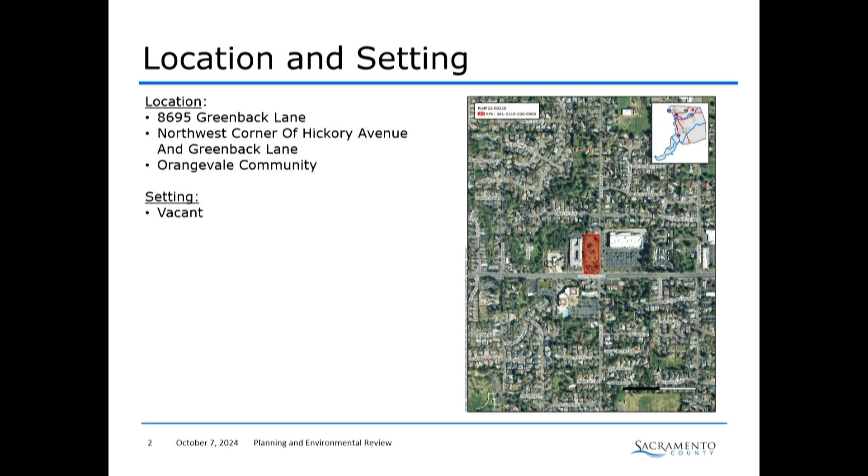The project site is located at 8695 Greenback Lane. The site is situated on the northwest corner of Hickory Avenue and Greenback Lane within the Orangevale community. The project site is currently vacant.

The project site is located within the Greenback Lane Special Planning Area, and it's within the light commercial subzone. Surrounding land uses include single-family residential to the north, a grocery store to the east, a gas station to the south, and a congregate care senior living facility to the west.

I do want to note that the site is identified within the housing element vacant land inventory for approximately 26 lower income category units. The proposed development of the subject parcel would not result in the development of those 26 units for the lower income category. However, it was determined that there are sufficient remaining sites identified in the housing element inventory for the lower income category in order to adequately meet the county's remaining RHNA sites.

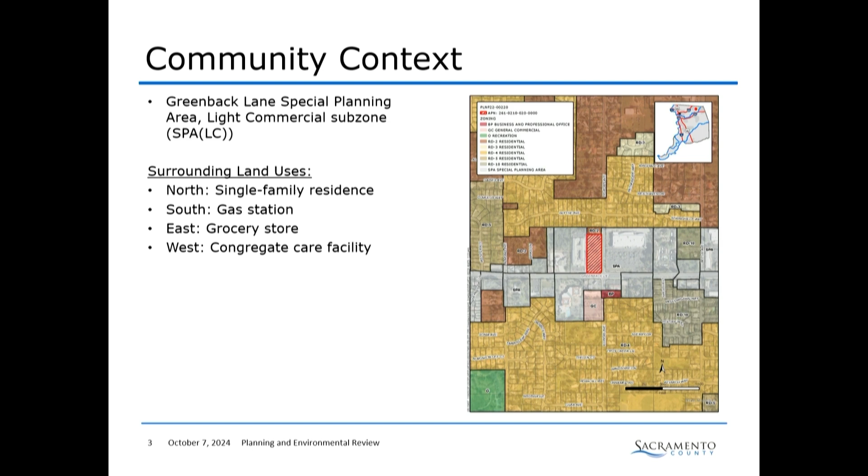Back in April of 2018, the board did approve a zoning ordinance amendment to modify the permitted uses of the subject property from business professional office uses over to uses permitted in the light commercial zoning district. This amendment allowed most of the uses permitted in the light commercial zoning district, including automobile service use and mini storage uses. There was one code violation cited for the subject site for overgrown vegetation last year in 2023. However, that violation has been remedied and closed.

The entitlement request consists of the following: a tentative parcel map to divide a 2.84 gross acre parcel into 2 new parcels in the Greenback Lane Special Planning Area, a use permit to allow an auto service station, more commonly referred to as a gas station, as well as a neighborhood convenience store with extended hours, that being 24/7, within the Greenback Lane SPA, as well as for the proposed gas station fuel canopies to deviate from the following development standards: the design clearance height, as well as the allowable roof structure height.

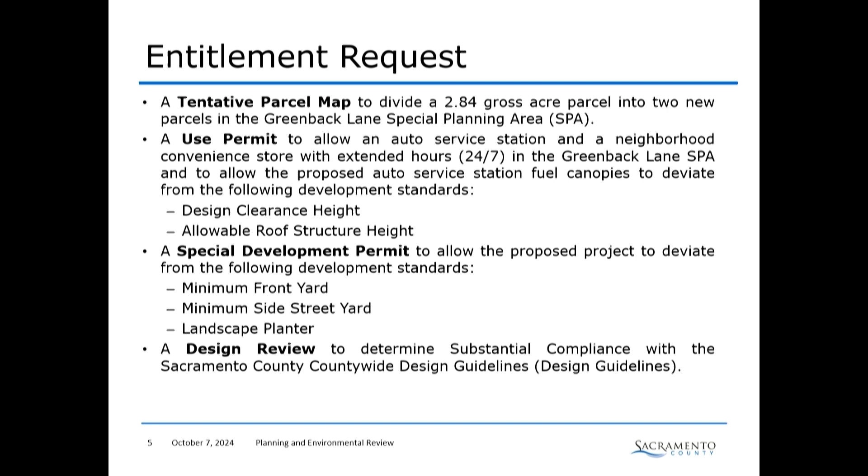Please note that there has been updated language pertaining to the greenhouse gas emission mitigation measure, that's mitigation measure F and condition of approval 33, and that clarifies the project's proposed use of natural gas. That language does not change the project obligations or the process that's been previously discussed. This measure clarifies that reporting would be required in order to demonstrate compliance with the mitigation measure if the project is implemented using natural gas infrastructure.

Moving on to the next couple of slides, I'm going to go over several of the project exhibits and walk you through them. The first one is the tentative parcel map.

As mentioned previously, the vacant property is currently proposed to be divided into 2 new commercial parcels. Proposed parcel 1 is this corner lot, where the proposed gas station and convenience store will be located, with approximate acreage of 1.33. Proposed parcel 2 is where the proposed mini storage facility will be located, and that one will be just over 1.5 acres in size.

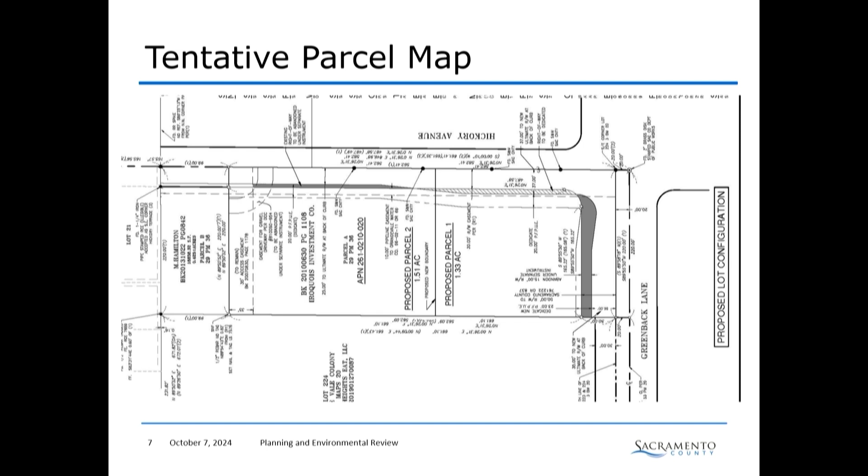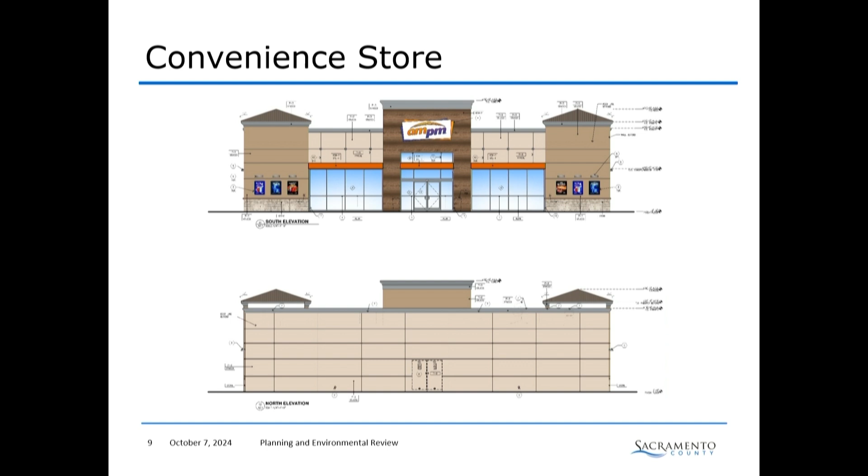Going back to the use permit request, there is a request to have the fuel canopy deviate from the design clearance height. The maximum allowable height is 16 feet, and currently, as proposed, the design clearance height is just 16 and a half feet.

The other requirement is the allowable roof structure height, which shall not extend higher than 2.5 feet. The proposed canopy structure is going to be approximately 3 feet 4 inches. The applicant has mentioned that the intention of deviating from these standards is to allow the canopy to meet the architectural requirements under the SPA.

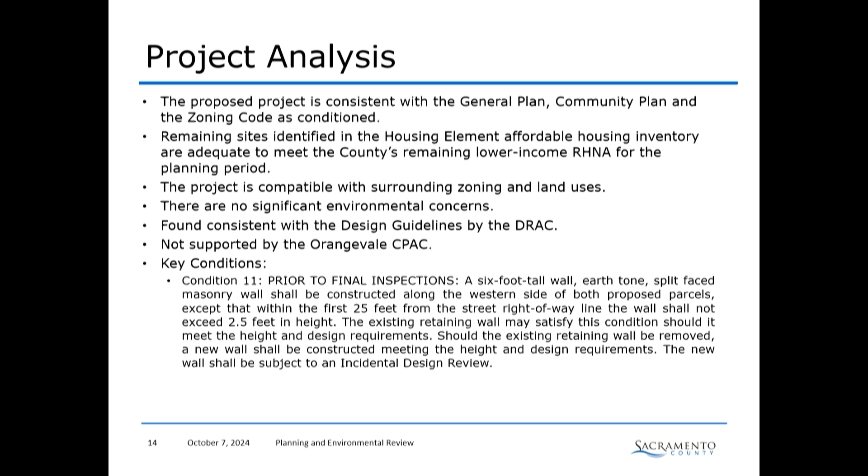Planning and Environmental Review staff recommends that the Planning Commission make the following recommendations to the board: determine that the environmental analysis prepared pursuant to the California Environmental Quality Act is adequate and complete with the proposed modifications outlined in the memo provided; adopt the mitigation monitoring and reporting program; approve the use permit subject to findings and conditions; approve the special development permit subject to findings and conditions; approve the tentative parcel map subject to findings and conditions; and lastly, find the project in substantial compliance with the design guidelines, subject to findings and conditions.

This concludes the end of my presentation. I'm available to answer any questions that you may have. Additionally, we also do have the applicant team present as well. Thank you.

Thank you, Mr. Huerta. Questions for staff this evening? Thank you for the presentation. I appreciate that. Had a couple questions. I was hoping you might be able to provide a little clarity.

As I understand it, the Greenback Lane SPA requires some sidewalks, or I think in the analysis there was a reference to meandering sidewalks. Can you provide how the project is either...

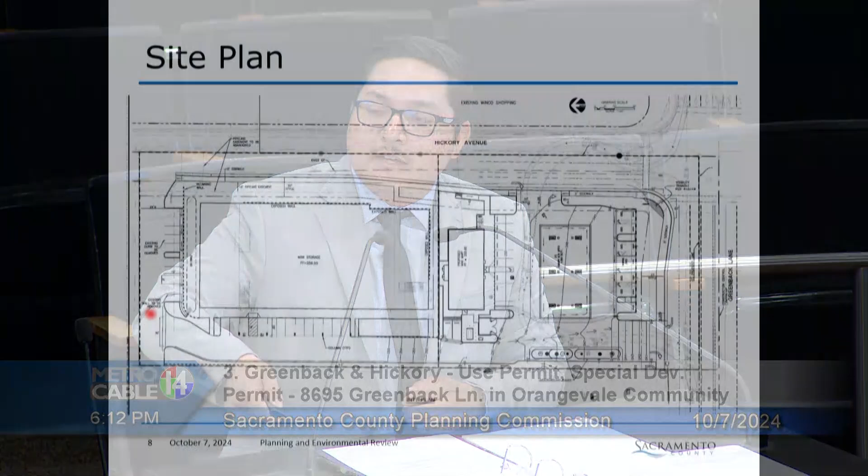And then is there a masonry wall between that easement and the residence next door? Yes, there's currently an existing sound wall that sits right along the property line of the resident who lives on this side.

Okay, just for clarification, I think it's in the staff report, but the mini storage use would be a by-right use with the existing zoning? Yes, that's correct, no use permit would be required for the mini storage use. So the use permit is only pertaining to the gas station. Okay, and convenience store. Yeah.

I think that's all my questions for now. Thank you, Mr. Huerta. Any other questions for staff before we move to the applicant?

Yeah, just one last, thank you Chair Rathel. I saw that the last letter submitted by the senior living facility adjacent to the property was in May of this year, in anticipation of the CPAC hearing. Have we received any other notices from them or further engagement addressing their concerns after the CPAC had voted? We did, it was pertaining to when we took the PCN letter component in September to the CPAC, but we haven't had any further correspondence with them since September.

All right, any other questions for staff? All right, thank you. Thank you.

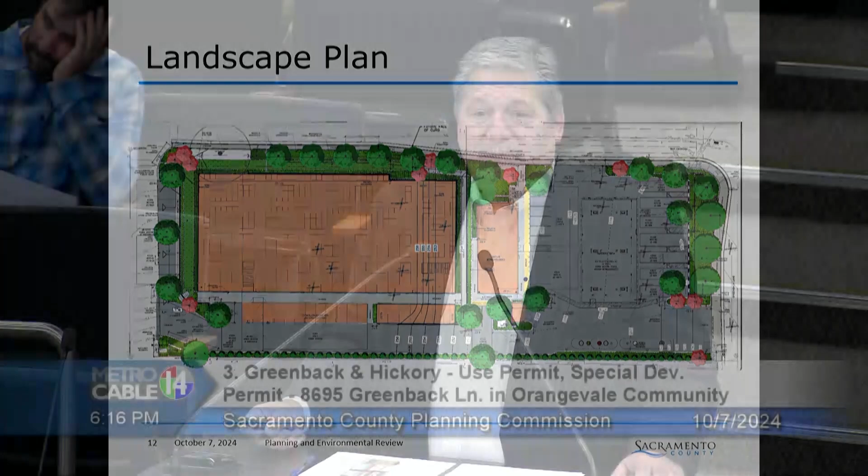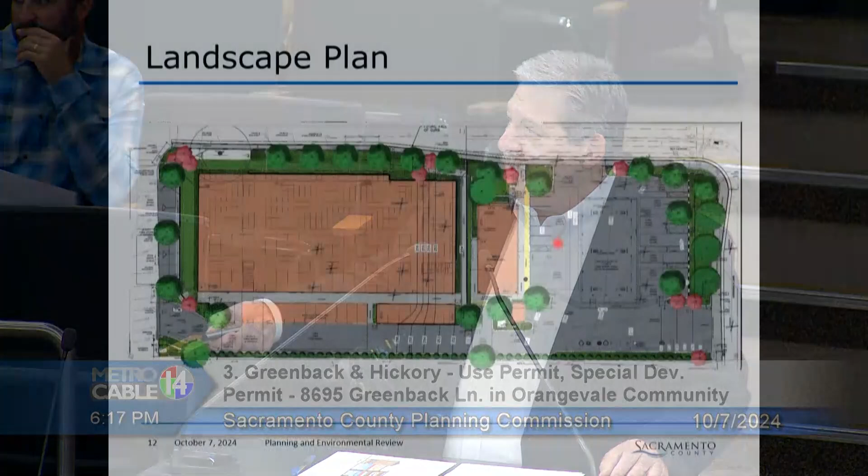If it pleases the Planning Commission, I'd be happy to accept a condition that also puts a fire gate right there. That would be a permanent gate, what we call a Knox box, where fire trucks can push through it as a secondary preventative measure for people coming through. But we don't want people coming through this driveway and then ending up behind here and trapped. We want them to be cut off here and not have to make the journey back along the back of the building.

One of the reasons we originally planned to have this planter behind the two-story building, it was originally three feet wider; we were going to put the full planter in. The fire department came to us with a request and asked that we reduce it so they can have enough vehicle access for emergency trucks. So we accommodated that. There will be shrubbery, landscaping, and vines on that wall, but the only people that will ever see it are those who rent a storage unit. It is invisible to Hickory Avenue and Greenback.

The rest of the project has a tremendous amount of landscaping, and if any of you know the corner of Howe and Fair Oaks, where I recently planted 52 hundred-year-old, 150-year-old olive trees, I will be doing that in this project as well.

I've owned this property for 21 years, and I've been trying to find the right uses. I raised my family for 20 years, a mile and a half from this site. I developed a $40 million shopping center at the corner of Hazel and Madison.

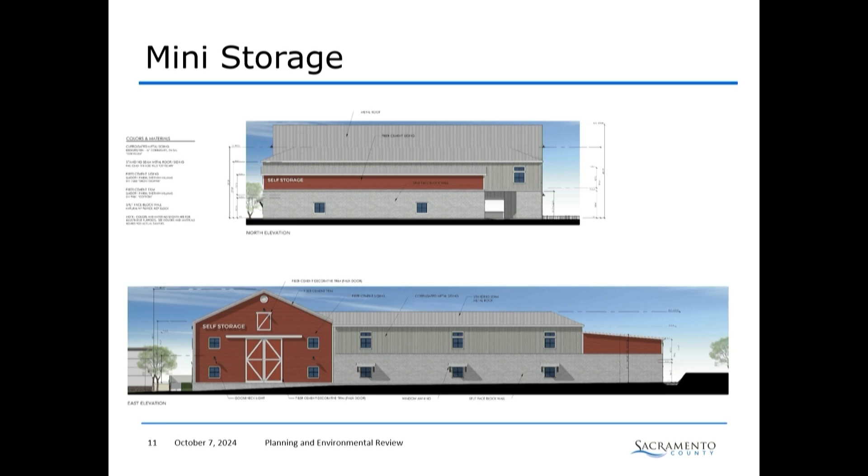That process takes place after a conditional use permit is issued, if it's issued. There is monthly reporting to AQMD. If you exceed the amount of gallons that they say you're allowed to pump, they shut you down. It's that simple.

This spillage of benzene, which is the critical element for gasoline, occurs when somebody drives off with the hose connected to their car. Ever since we all agreed to use those rubber gaskets that are on the fuel pumps, that eliminated the free flowing of benzene into the air. Benzene dissipates to 75% in 100 feet and completely within 200 feet of the source.

So something along the lines of 1 per 100,000 customers drive off with the hose still in the car. There's a release of 6 to 8 ounces of benzene, and it dissipates within 200 feet. The prevailing winds then come into account, and they would be heading south, which might get us to the other side of Greenback Lane.

I want the commission to know that I take very seriously concerns of communities. I have, my entire development career, I've built nearly 100 projects just in this region, and I would like to address those that were brought up at the CPAC.

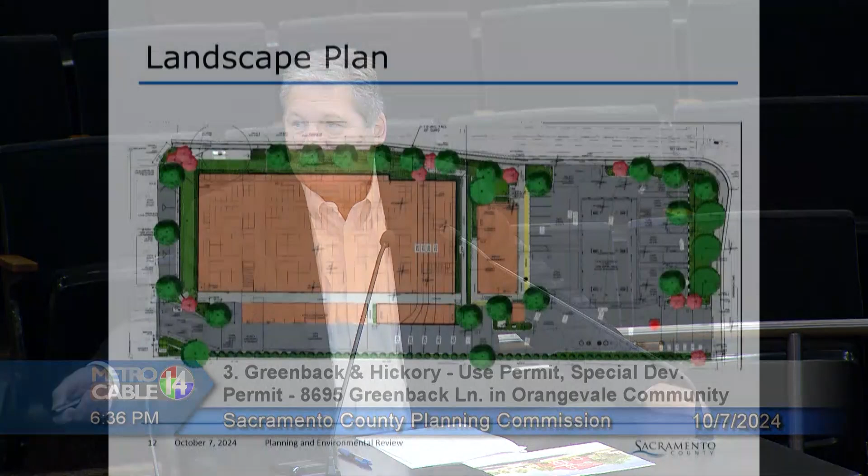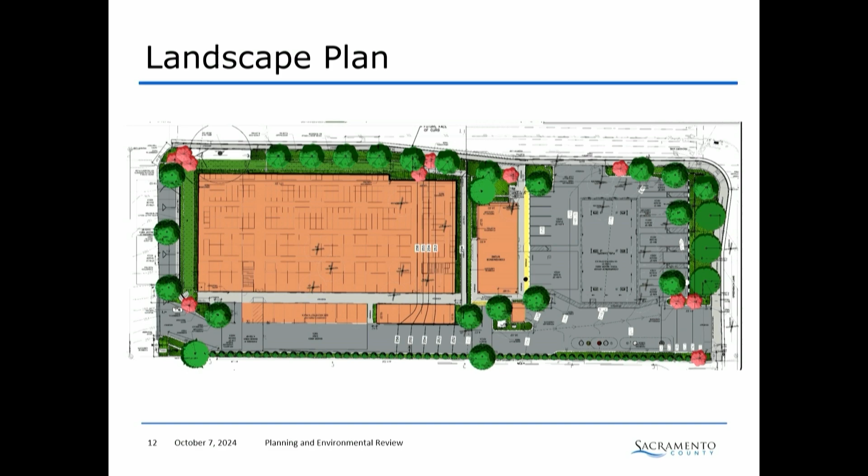And in the 7-foot wide planter that does exist down by the service station, there's also not trees per the development standard. I believe there are trees right here - this is a 7-foot planter, and it only dips to the 4-foot planter from there to here, which is invisible to the public. We will plant shrubs along the western boundary of the property here, but here there will be trees planted and shrubbery. And then these are larger shade trees - these might be ornamental in nature along here, but these will be larger shade trees associated with the 50% coverage of shade requirement for parking spaces.

Yeah, I'm really worried about the property line trees because they look the same on the landscape plan - whether they're in a 7-foot wide or a 4.5-foot wide planter. The architect is here. That sounds great. Maybe he can answer that. His name's Ahmed.

Good afternoon, Mr. Chairman and members of the Planning Commission. Ahmad Gadiri with ANS Engineering. For the record, I have been sworn. To reiterate what Paul indicated, the 7-foot planter that's along the west side of the service station does accommodate additional trees.

However, we're still getting comments back, so this plan will be updated to reflect the required trees, if I'm not mistaken, every 30 feet - I think that's what it is. Based on the dimension along that path, you're probably looking at about 3 to 4 trees, and it'll be updated.

If you don't mind, maybe you can shine some light on the request from Metro Fire - it seems like you were the only one. I figured maybe the architect had more technical information on this, so it seems like an odd request. Ahmed represents ARCO and does all their work. I hire the architect for the overall planning and the self-storage facility, and that was a direct comment as we were going through the pre-development process and application.

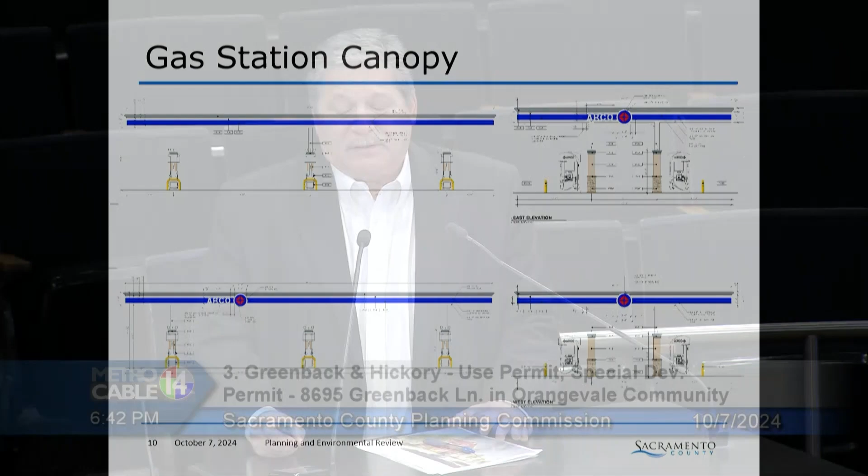Oh yeah, no issue, sir, with the height. It was just that second one, the allowable roof structure height that we're increasing. I was just wondering why that's the case. Like, was there a plan to put solar panels in there to make the structure more sound?

I just wondered why the staff report mentioned that specific 1.5 feet. I don't know why the SPA mentioned that specific number. Oh, I can go ahead and answer that, or Irving with planning can.

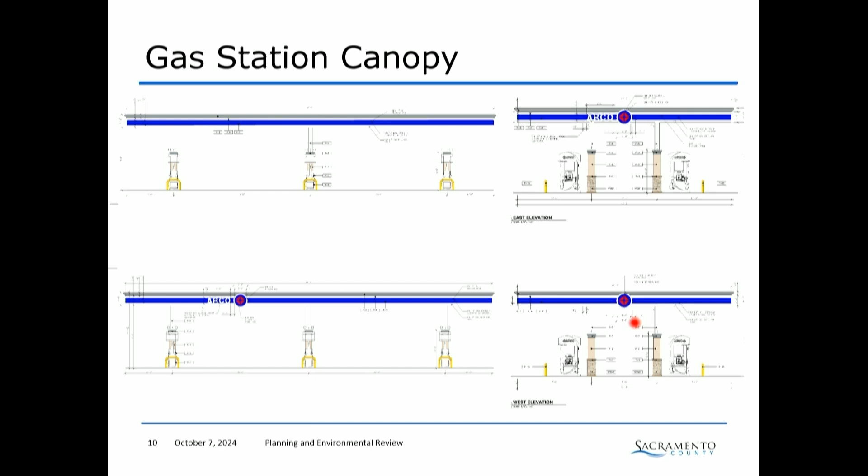It might be hard to see, but right on top of the structure there's a thicker, beige, grayish roof line located there. If you look at the exhibit, right around there. So they're adding that, and also adding the stone pillars with stone veneer over here. They're increasing the height again to give that town and country aesthetic appeal for the Greenback SPA. There'll be masonry on the columns.

So if I'm hearing you right, sir, adding the masonry to the columns basically increases the height, and it's not more of a structural component. Okay, understood. Thank you.

Thank you for shedding light on your dealings with the previous owner of the adjacent property. If we were to move forward with this item, would that become an issue? Or do you see anything in our approvals that would preclude you from moving forward with the project, assuming we vote on this today, given your relationship with the neighboring property now that they've sent all these other comments?

The neighboring property owner is not the same as the developer. They purchased it after I submitted my application. What I understand is through the easement I granted for their emergency access and secondary access, because they only front on Greenback on a narrow frontage.

I'll do whatever is required, but I have a certain amount of parking I've got. It's a large building, but I don't need a lot of parking because it's self-storage and a pretty dormant use. But maybe I'm misinterpreting the request on that easement area.

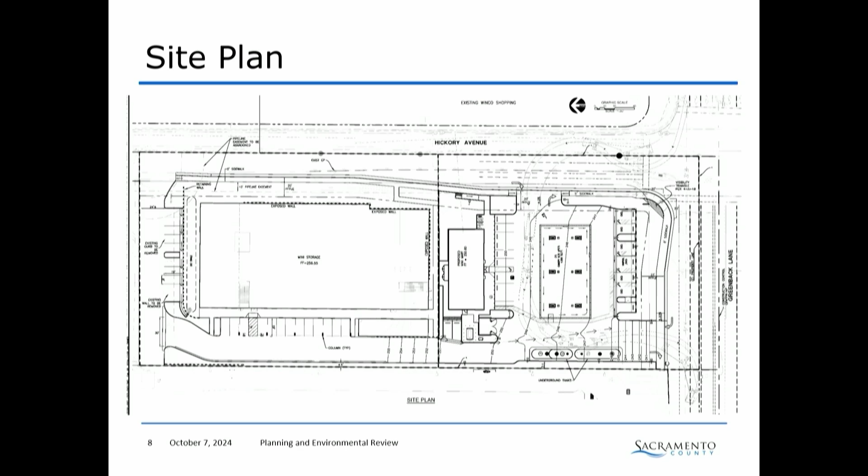That's a trick we use in shopping center parking lots to create more room, because a drive aisle doesn't have to be as wide with angled parking. There are a lot of different solutions that could work here. It puts us between a rock and a hard place, which is why I constantly talk about special development permits and the position it puts us in—because once we approve one, we're far down the road. So I think it's fair not to give me that deviation and let me make changes and convince staff and the Board of Supervisors that it works.

I'm not trying to circumvent this body, but I can do that. That addresses my earlier comment—I didn't know if the applicant would characterize that as an approval or a denial, but now it sounds like he's saying it's feasible. So you could couch your motion as a recommendation for approval except for that one deviation, with additional instruction to the board explaining why we want an extra 3 feet along the west side to plant trees or whatever.

So that's the front yard on the east—sorry, I get confused between front yard and side yard when we're on a corner. So the front yard easement right now is 27.2. Would you like us to modify that as a potential, or just leave it alone? I think you can leave it, because any changes they make will need to adjust the details of the request accordingly.